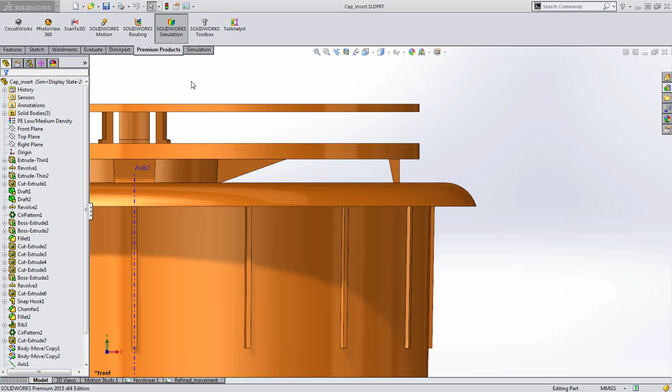There are a lot of great enhancements in SOLIDWORKS Simulation 2015 to really help solve analysis needs faster, as well as get greater understanding of the performance of your design.

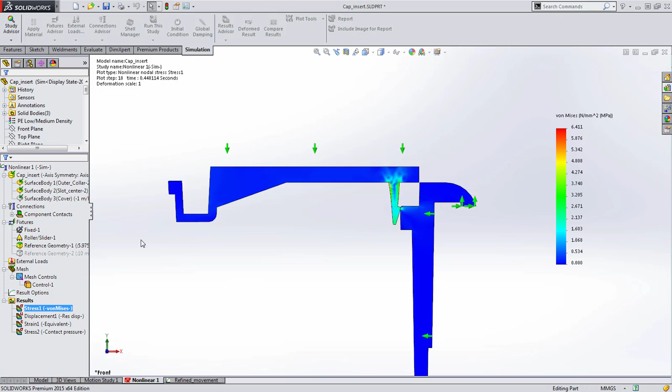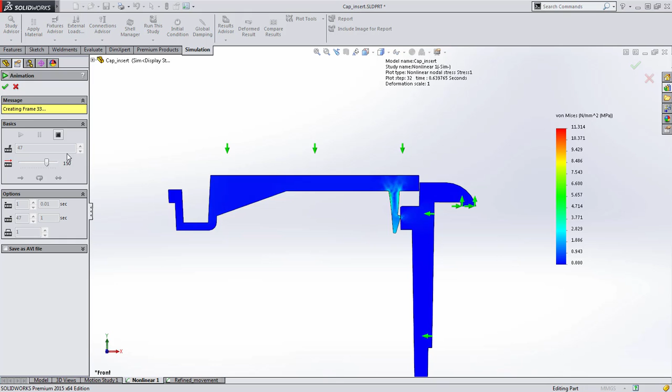With nonlinear analysis, it's sometimes difficult to know how the model is performing during the solve until the very end. That need has been addressed in 2015 with the ability to view nonlinear results at each time step while solving. This gives you immediate feedback as to what is taking place in the model, so it's easy to see if there's a problem, stop the calculation, and correct it immediately instead of having to wait until it completes. This can be a huge time saver in addition to providing immediate feedback on the progress.

It's been a challenge in the past to analyze models subjected to a large number of load conditions. In 2015, the new Load Case Manager makes it very easy to set up a large number of load conditions in a tabular format. There are even filters for focusing just on loads, restraints, or connectors. It's quite flexible and easy to modify, with the ability to toggle on specific loads or restraints, as well as adjust the values of the loads to suit the load condition.

For example, let's apply a torque load to the bracket. This interface makes it very convenient to tailor the loads as needed.

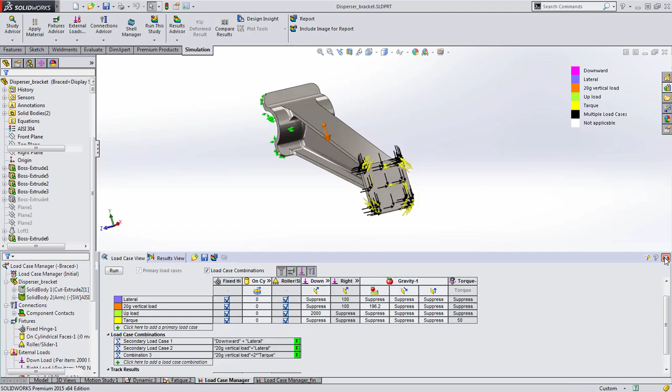Formulas and equations can be used to combine load cases together to ensure compounded performance requirements are satisfied. As you can see, this covers many facets of testing in one location, significantly reducing time and the setup work needed.

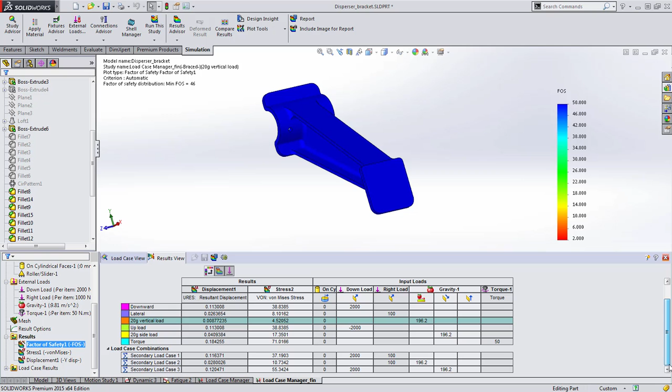Results are viewed in the same tabular format, where you can look at any of the load cases that have been run. You can also track critical performance information using sensors to compare performance across the load cases, such as peak stresses or deflections. This aids in identifying the most critical load cases.

When it comes to vibration analysis, durability and fatigue are a common concern, but it's also beneficial to identify key characteristics for the various vibration modes. This is in addition to our response frequency graphs we have, which don't give us the insight we need into the key contributions for our different components.

So a new frequency response graph has been added to enable review of mass participation for the modes. This helps in identifying the direction being excited by a particular mode, as well as the proportion. In this instance, we can see the Z component is being excited for the first mode the most, followed by XY for the second mode, and so on.

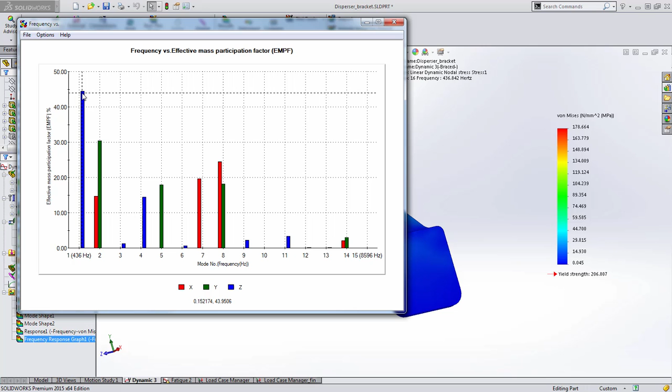We can also adjust to look at the cumulative mass participation to show, over all of the modes, the cumulative amounts combined. So we can see for the Z component, the first mode is the key contributor.

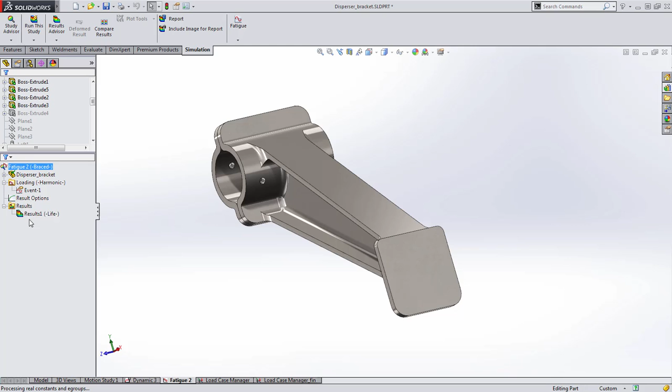Fatigue studies now support loads from random or harmonic vibration analysis. Specific frequencies can now be chosen to perform a life analysis, or multiple frequencies at different cycle amounts can be used to determine cumulative damage. This is a great way for verifying the durability of your design.

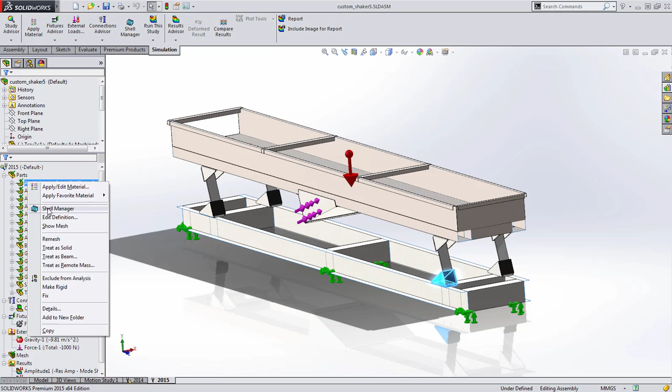New for 2015 for SOLIDWORKS Simulation are improvements for managing properties of shell structures. There's a new shell manager that enables a convenient way to specify properties of shells in the model. A listing of defined shells is displayed at the bottom of the screen. The display can be adjusted to show shell material on screen and in the list, as well as shell thicknesses.

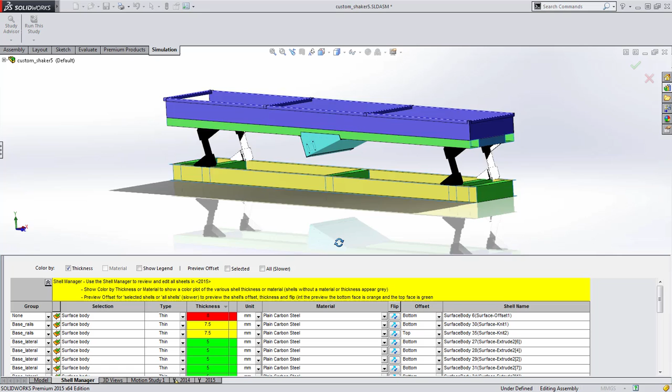The thickness of selected items can be previewed in 3D on screen to ensure the offset option is correctly set for each shell. The thickness, material, and offset can also be adjusted directly from the table.

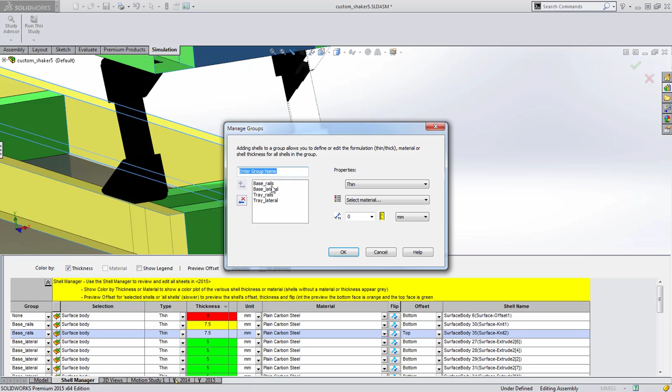In the left column is a groups category. The power of using groups is being able to assign uniform properties to multiple surfaces. So for example, if we modify the base lateral thickness, that applies to all the surfaces in that group. This saves an incredible amount of time compared to manually adjusting each surface one by one.

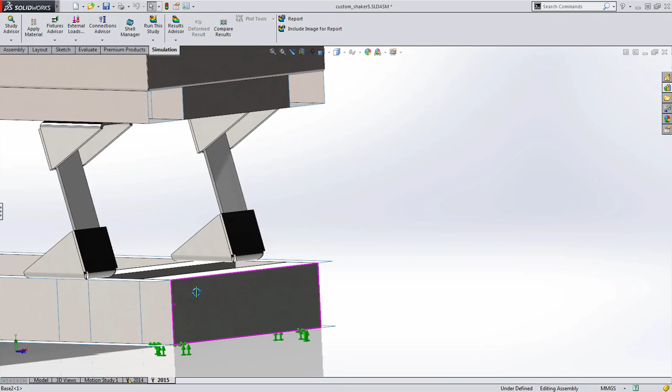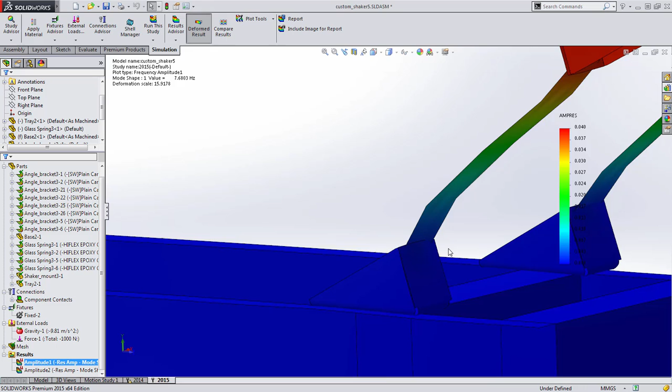Another aspect improved in 2015 is not only creating and solving shell models, but also automated contacts. In particular, self-bonding for sheet metal parts with gaps was not supported. This is automatically accounted for in Simulation 2015, so when we compare the results, bonding is being honoured. So some great enhancements for shell models in 2015 that will make model setup and modification much easier.

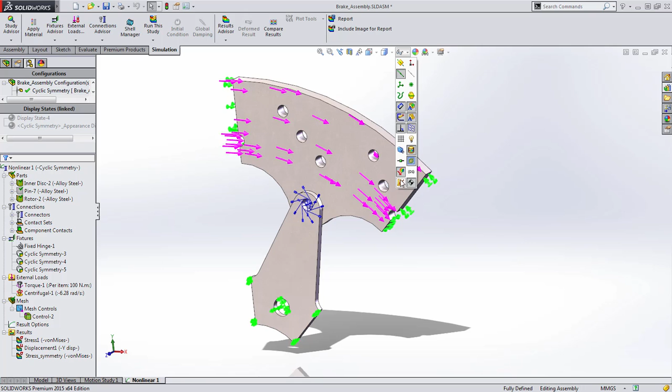Due to the lengthy solve time in most nonlinear analyses, any means of simplifying the model is greatly beneficial. We now support cyclic symmetry in nonlinear analysis. As in the case of this brake rotor, we need only take one segment to perform the analysis, significantly reducing the model size and solve time to verify the performance.

SOLIDWORKS Simulation also supports the display of symmetric results on the full model, to make it easier to visualize and convey results to other people. Symmetry analysis also gives us the ability to do far more refined analysis in less time than was previously possible.

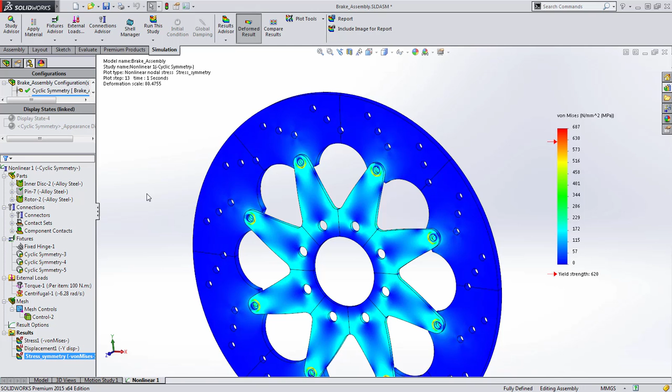Also new is support for self-contact on a face. This is important in parts that have swept or lofted features, or that just have faces that can bend back and contact themselves.

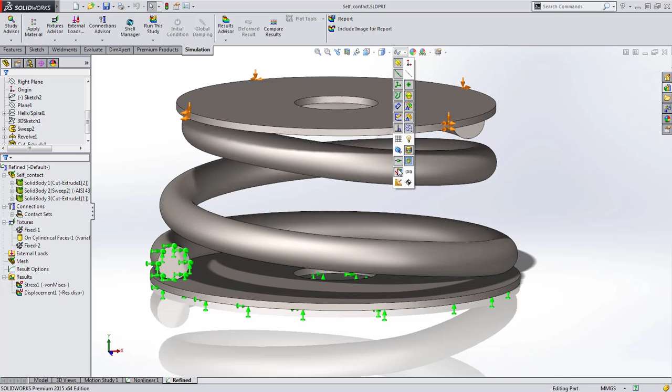This is also the default contact for when a single face is selected. This avoids workarounds in the past where you had to split up faces to account for these scenarios. So this really simplifies the workflow and setup for tackling these types of situations.

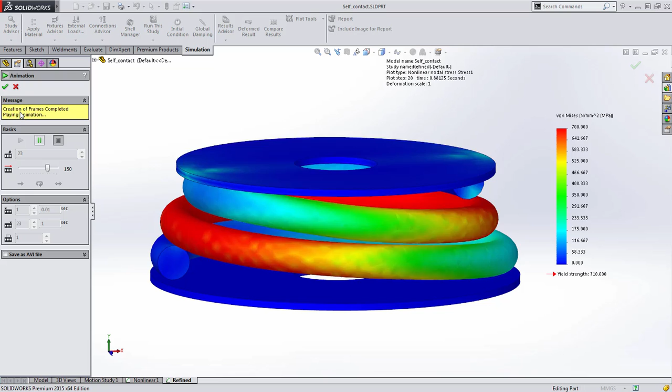So SOLIDWORKS 2015 delivers a lot of great capabilities for understanding our model performance, as well as getting solutions in a much shorter time frame.